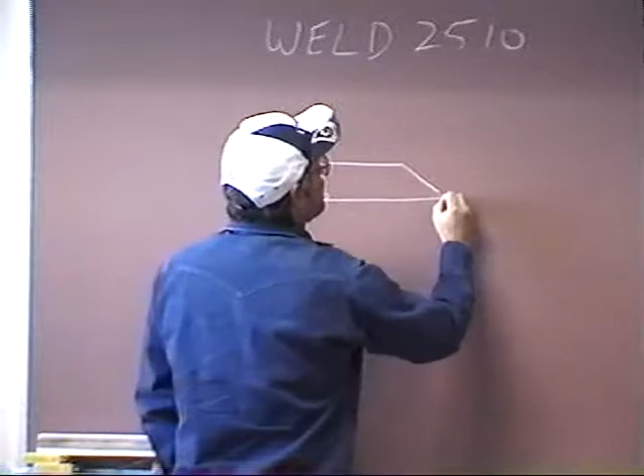Keep that in mind whenever you're making your weld. So you've got solid metal there, and when you put that weld in there, it has got to be solid metal. If you have a discontinuity, a defect in there—trapped slag, porosity, something of that nature—then you don't have solid steel to solid steel.

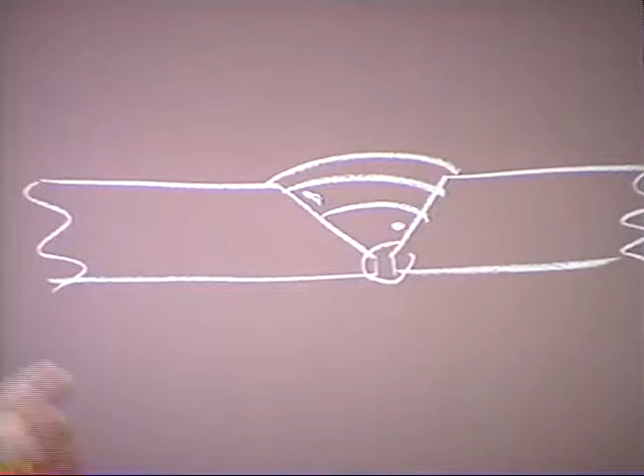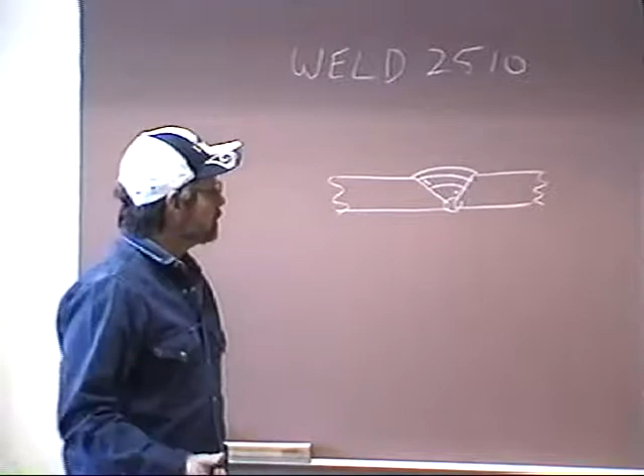And of course, if this trapped slag and porosity or any other indications exceed allowable limits, then you have a defect. It's very important. As a craftsperson, as the welder, the one applying that weld, you are your own best inspector. You've got to watch it. You've got to make sure that you do it correctly.

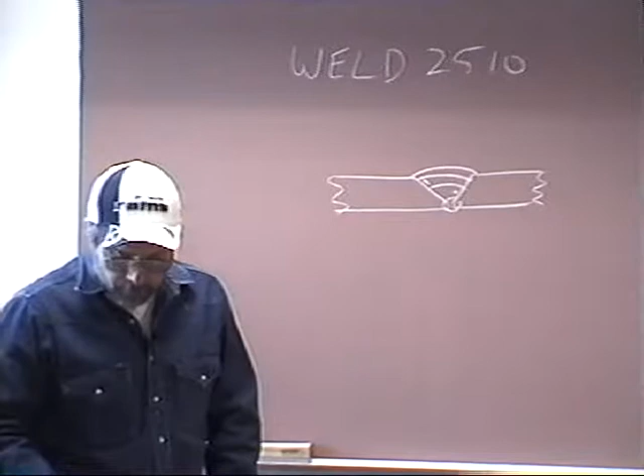To be a successful pipe welder and achieve high-quality welds, such as shown in Figure 1.1, it requires practice in welding pipe. It cannot be learned by reading a book alone. However, if incorrect techniques are repeated, practice alone will never lead to successful pipe welding.

We do an awful lot of training of people who have been in industry. Some of them are quite good. Some of them, however, have never taken a lesson in their life, and they think they're doing things correctly, but they don't understand proper technique, and they don't really think about the overall quality of the weldment.

One of the tasks that my colleagues and I have when we're teaching somebody how to pipe weld is to break bad habits that people acquire over years. If you start out doing something incorrectly and nobody ever shows you the proper way to do it, you will continue to repeat those incorrect techniques, and you're not going to be successful in this as an endeavor. So pay attention to what we're teaching you and try to follow our techniques, because it's proven repeatedly through practical terms that they are successful and they are correct.

Flip the page. Let's talk about pipe welding positions. We've covered this pretty much in other courses, so this is more for those of you that have taken this as a standalone class. On page 2 it says the welding positions are defined by standard symbols which are shown in Figure 1.2.

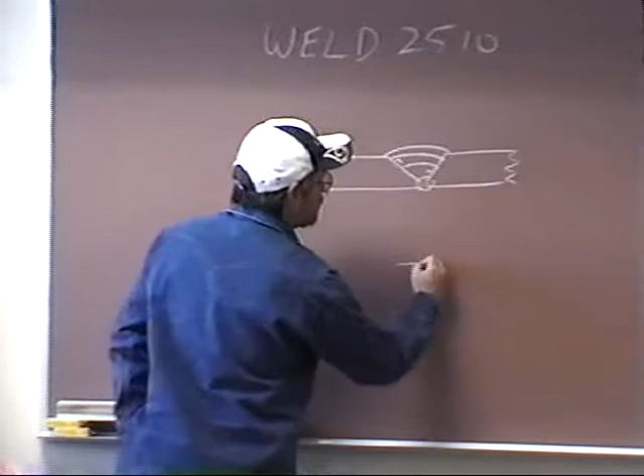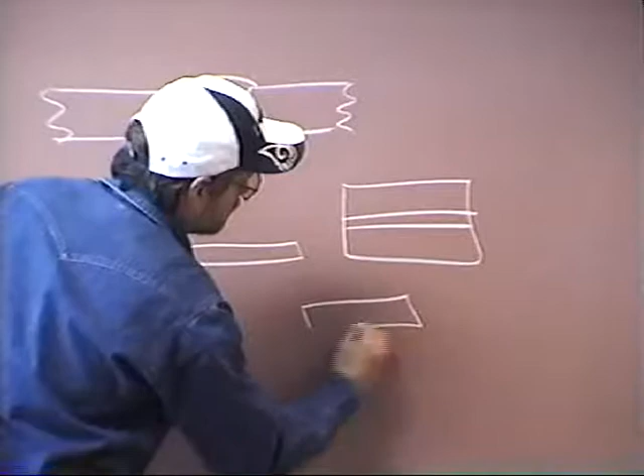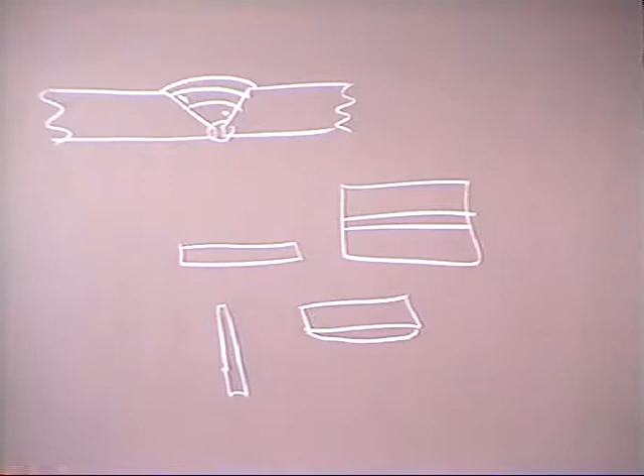And of course we have flat, horizontal, vertical, and then overhead, where your weld is on there. So flat, horizontal, vertical, and then overhead. And they're defined as 1G, 2G, 3G, and 4G positions.

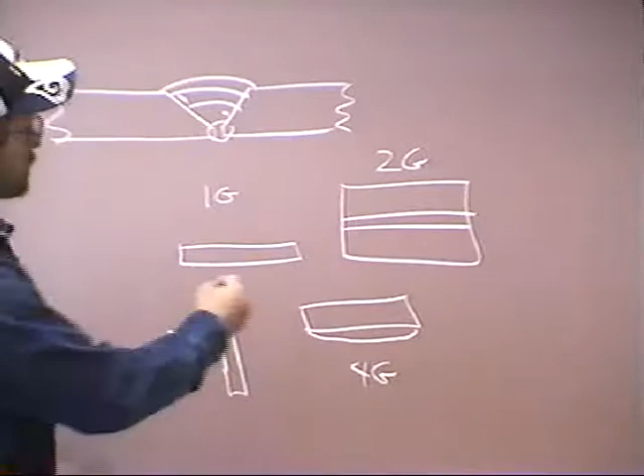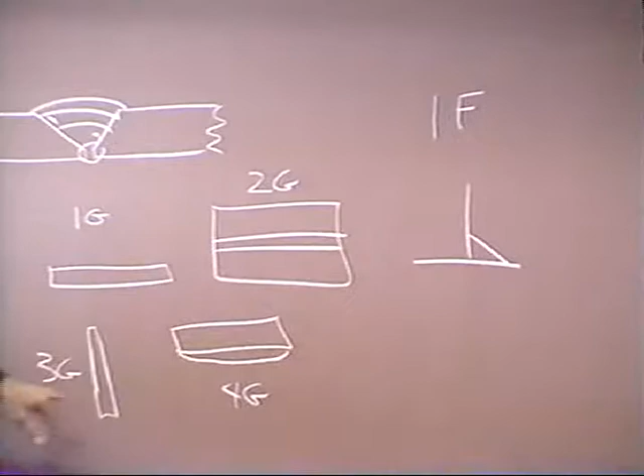1G, 2G, 3G, and 4G. And the G, in this case, stands for groove, since we have a groove weld here. If we were doing fillet welds, instead of a G, we would have an F. So a fillet weld would be something that you might put on a T-joint. Instead of being 1G and so forth, it would be 1F, 2F, 3F, and 4F.

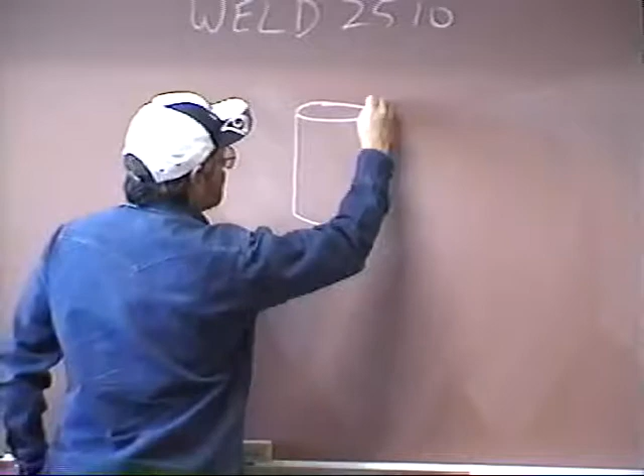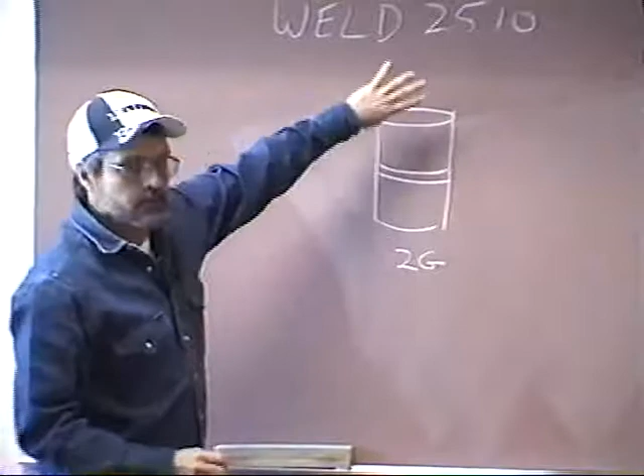The ones we're concerned about in pipe welding—there's only 3 symbols used in pipe welding. We have the 2G position, like so: 2G, in which the pipe is vertically fixed. This is called the vertically fixed position, but you're welding in the 2G, or horizontal, position.

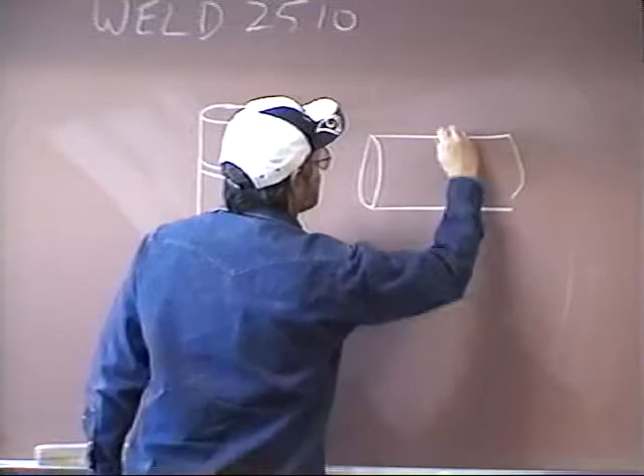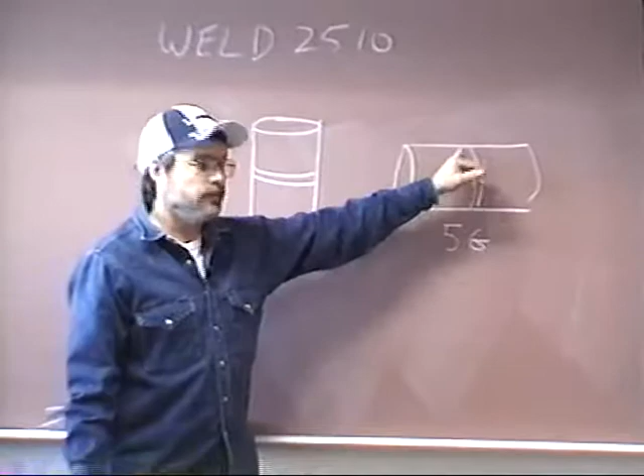Then we have the 5G position, in which the pipe is horizontally fixed, and the weld is then vertical. And of course you can go vertical up or vertical down, depending on the type of steel, the procedure you're using, and any alloying elements that's in the steel.

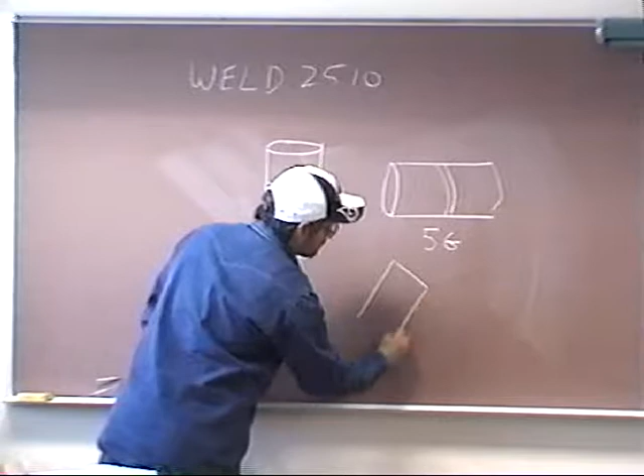And then finally, we have the 6G position, which is a 45-degree angle. Its nickname is an Arkansas bell hole. You may hear that term.

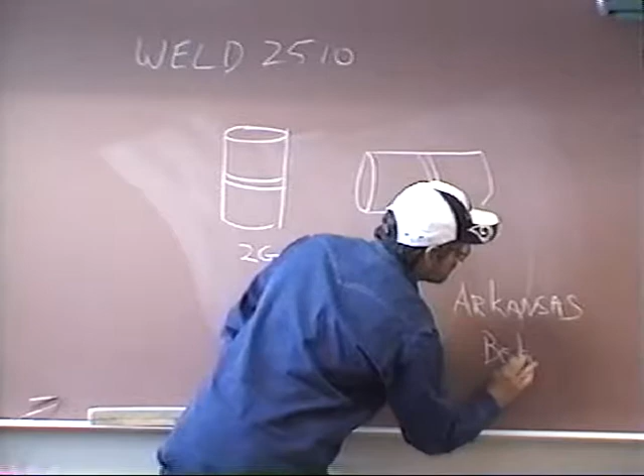An Arkansas bell hole. It got that nickname because in Arkansas, if you've ever been there, you have the Ozark Mountains up in the northwest corner, and it's just hilly, very, very hilly. Anyway, that's what it's called.

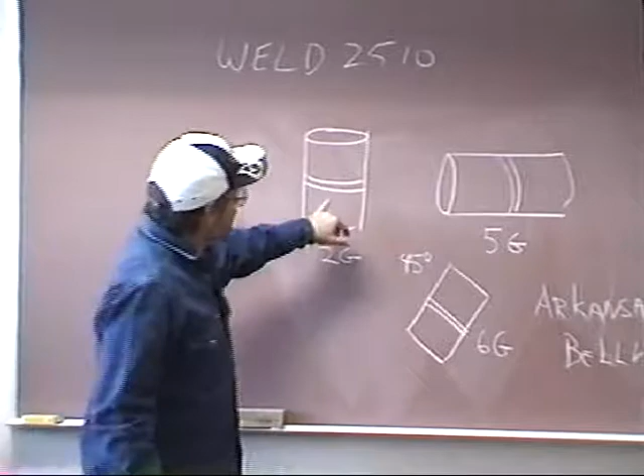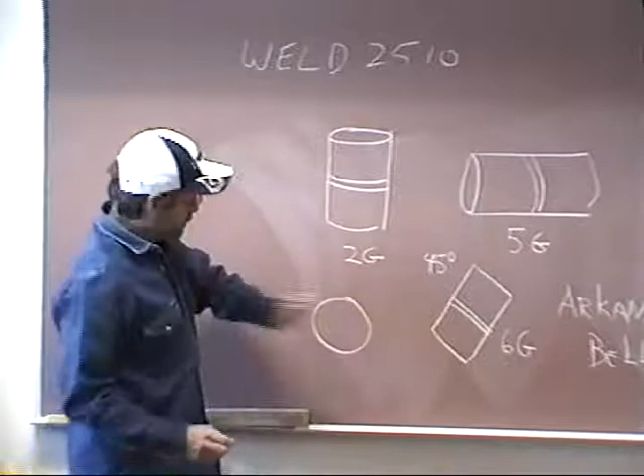So you have 2G, 5G, 6G, and when you go to test out of this class, we're going to have you take one piece of pipe, looking at it down, and weld half of the pipe in the 2G position, the other half in the 5G position. This is simply to test out of the course.

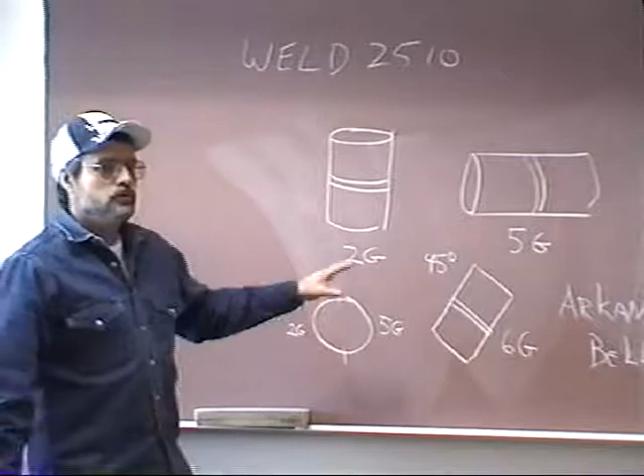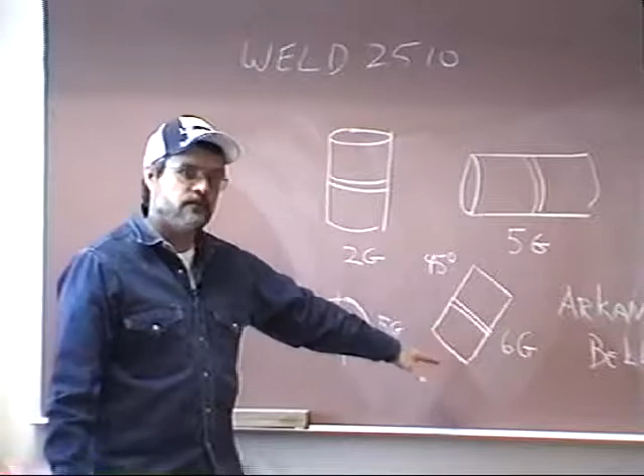When you go to do your 6G position, we will have you do an entire pipe in the 6G position. The reason is because you're not only testing out of the course with that, but if you successfully pass and meet all the visual examinations and destructive tests, we will write you welder certification papers based on your 6G position. So those are the positions we're concerned about in pipe welding.

Going back to your book now, look at the bottom of the page where it says: in preparing to make the weld, the welder is concerned with the following matters. 1. The type of metal to be welded. 2. The selection of the correct weld electrode. 3. The preparation and cleaning of the edge or weld joint. 4. The fit-up of the pipes to obtain correct alignment. All of those things are important, and they are addressed in the WPS, the Welding Procedure Specification.

Going to the next page, one of the things the welder has to be cognizant of whenever making the weld is the puddle and the keyhole, and we're going to stress that throughout this text. When you're making this pipe weld, doesn't matter which position you're in, it's just like when we were welding plate. You want to hear that sound of penetration, you want to see that little keyhole coming across there, and make sure you're tying into both coupons equally. So concentrate and focus on that keyhole as you're making your weld, particularly your root weld.

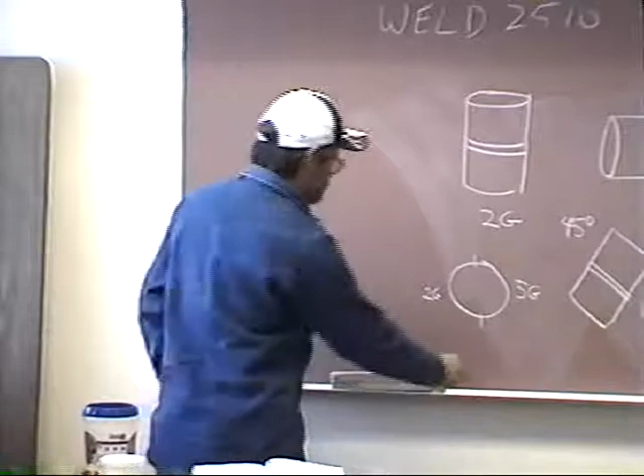Next heading is basic pipe welding procedures. It says when the pipe is in the 5G position with its axis horizontal, as shown in figure 1.3, positions on the pipe can readily be identified by their likeness to the numbers on the face of a clock. Thus, the top of the pipe is in the 12 o'clock position, the bottom of the pipe is in the 6 o'clock position. So here we have 12 o'clock, here we have 6 o'clock, here would be 9 o'clock, here would be 3 o'clock, and so forth.

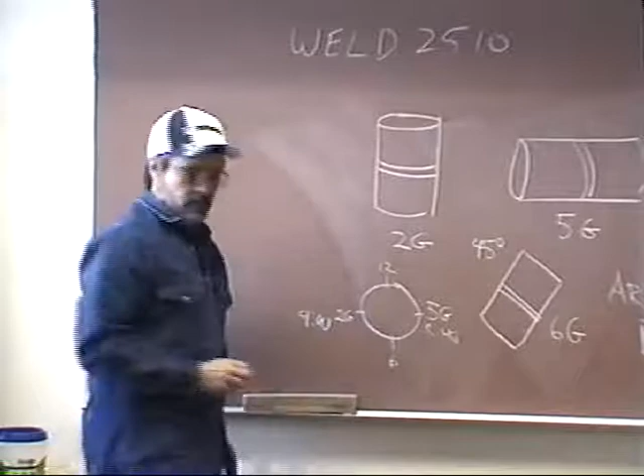Two different welding procedures are used when the pipe is in the horizontal position: downhill and uphill pipe welding. So it would be vertical up or vertical down. The choice of method is not affected by the diameter of the pipe. It depends primarily on the wall thickness and the alloy content of the pipe.

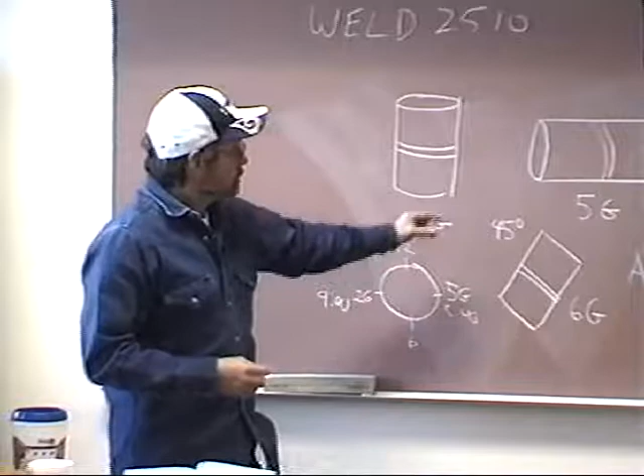So we could be welding just a piece of 2-inch pipe, real small as this cup. We could weld 2-inch pipe in the horizontal position, but it would be vertical up or vertical down. Or we could weld a pipe as big around as this blackboard itself is. Doesn't matter. Diameter doesn't matter.

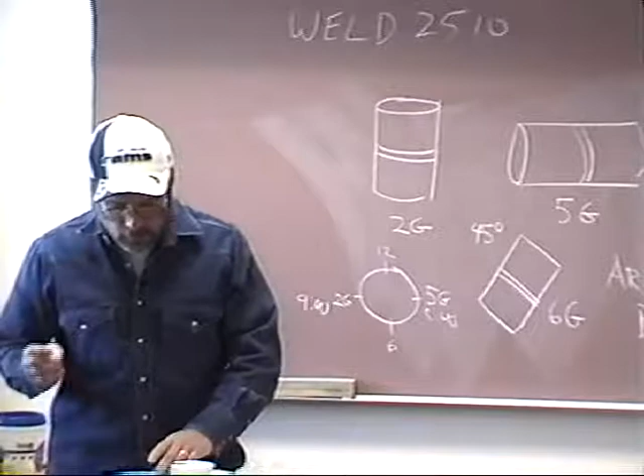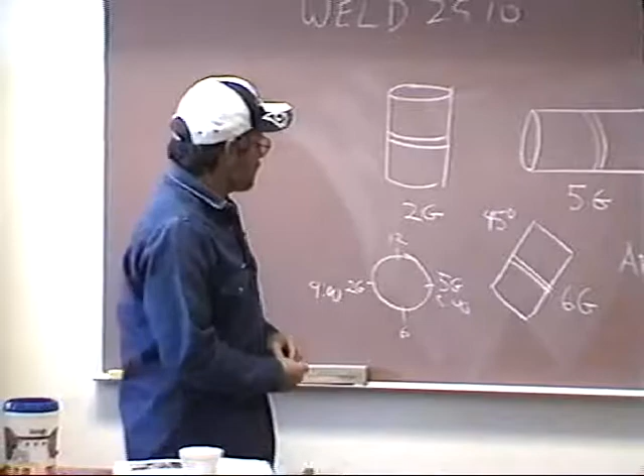Regardless of the method used, the pipes must first be tack welded together. For downhill welding, the weld is started at the 12 o'clock position, and the weld bead is welded progressively downward around the pipe until you get to the 6 o'clock position. Then you will go back up to the top, start at the 12 o'clock position again, and weld downhill once more. So when you're welding in the downhill position, you're going to start here, weld down, start here, and weld down.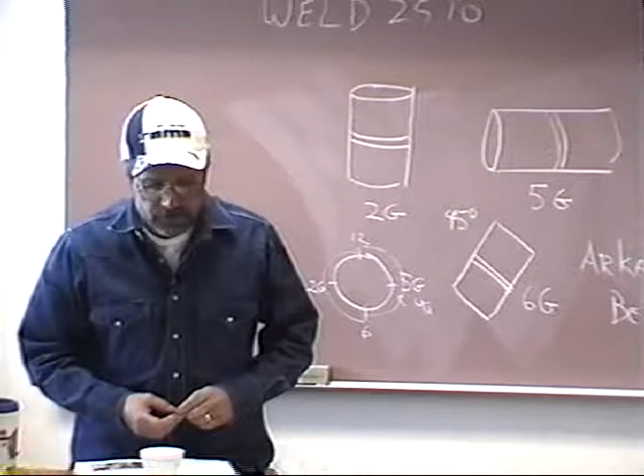Downhill pipe welding is used primarily to weld thin wall mild steel pipe having a wall thickness of 1/8 to 5/16 of an inch thick. The relatively thin wall of the pipe retains the heat longer than thick metal would. This causes the metal in the weld area to cool more slowly if the speed of welding and the heat input are the same. Slow cooling is desirable because a softer and more ductile grain structure is then obtained in the weld and in the weld area.

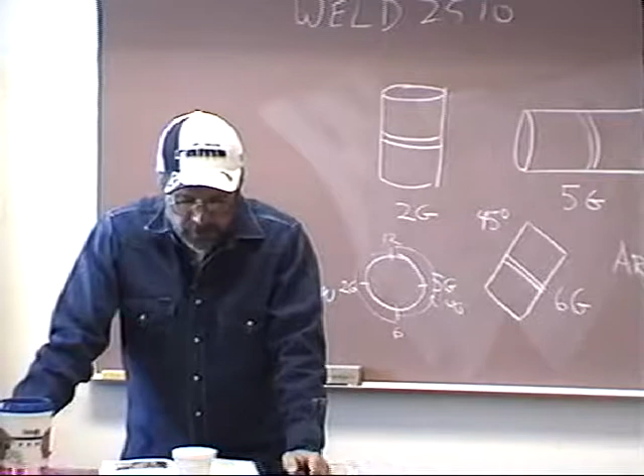When welding mild steel pipe, the slower cooling rate of the thin wall pipe makes it possible to deposit a weld at a faster rate without harmful effects in the welded joint. For this reason, downhill welding is preferred when welding thin wall pipe on mild steel.

The ductility of the metal in the weld and in the surrounding area can be further improved by depositing several beads around the weld. Each succeeding bead heats the previous bead, which then cools relatively more slowly.

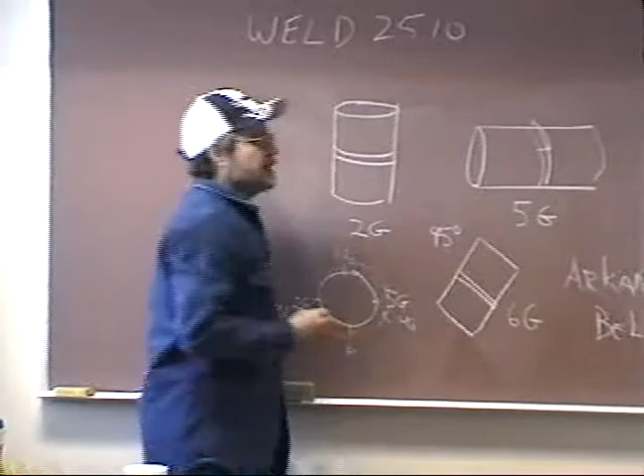With a lot of these downhill pipe welders that come in here to be tested, we will time how long it takes them to make a weld, starting at the top. Maybe they'll only get a third of the way down. We'll use our stopwatch to time how long it's taken them, and then measure how far they went. Using that and the amperage off their welding machine, we can calculate how much heat they're putting into the weld.

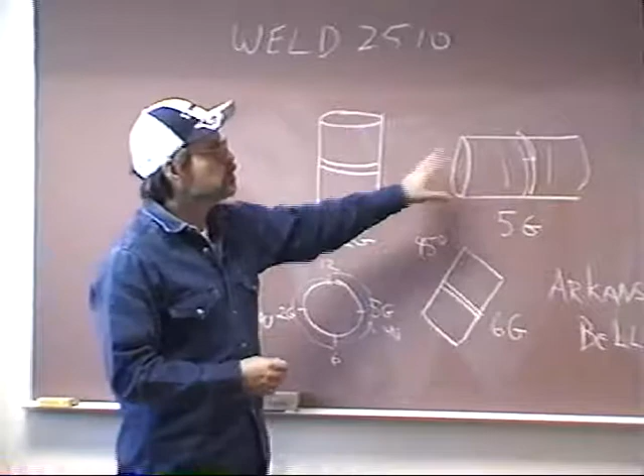We also want to check the interpass temperature. We'll take a crayon and make a mark a couple of inches from the weld area to see how hot that base metal is. All of that's designed to give us an idea of the rate of cooling, so we'll have some idea of what the grain structure is going to be like when they're finished.

Downhill welding requires the use of fast freezing, lightly coated electrodes such as 6010, 6011, 6012, 7010, and 7014. In today's industry, in our area here in southwest Wyoming, a lot of companies are using what's called 8010. Its trade name is 70 Plus, produced by Lincoln, but it's an 8010 rod.

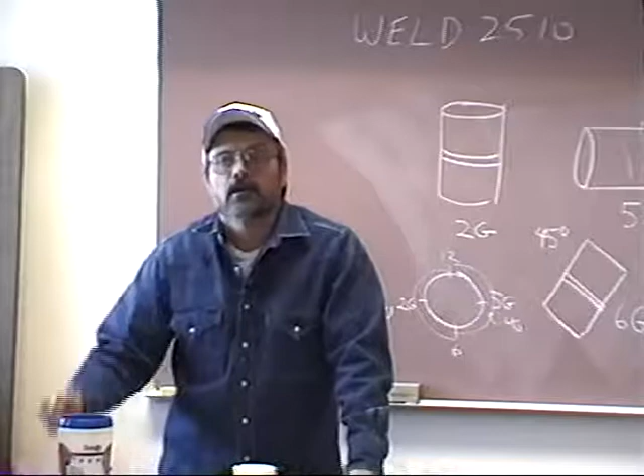It's a higher tensile strength, so control of the heat input is even more critical, because as you may recall from previous classes, the higher the strength, the more susceptible it is to cracking. So you really want to be careful about the amount of heat input that you have.

As the electrode is moved down along the joint, the molten puddle and its slag covering will tend to smother the arc, causing porosity and slag inclusions in the weld. The use of the proper electrodes, proper rod angle, and adequate travel speed, keeping ahead of the molten slag, will ensure sound welds. In some instances, the use of straight polarity along with the downhill method will eliminate burn-through when poorly fitted joints are encountered.

From previous lectures, you may recall that if we use straight polarity instead of reverse polarity, we're only generating half the heat input into the weld compared to reverse polarity. Therefore, if we have really thin stuff to weld, we're going to want to use straight polarity so we have less depth of penetration.

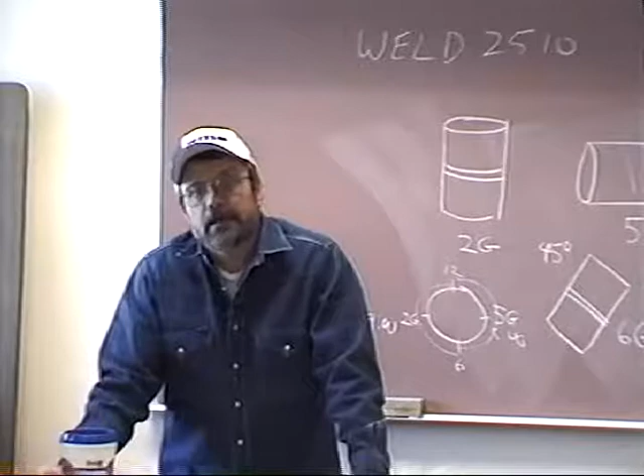The use of heavier coated electrodes such as 7024 and the iron powder, low hydrogen type electrodes such as 7018, are not suited for downhill welding because of the problems of slag entrapment. They really produce a lot of slag, and they're really not designed to be welded downhill, although 7018 is in some cases welded downhill on plate. I've never seen it used to weld downhill on pipe, but sometimes it is on plate.

Let's go ahead and turn the page to page 6. It says, in recent years, as the demand for larger diameter pipe with thicker walls for transporting crude oil over very long distances and natural gas at high pressure has grown, the pipe industry has responded.

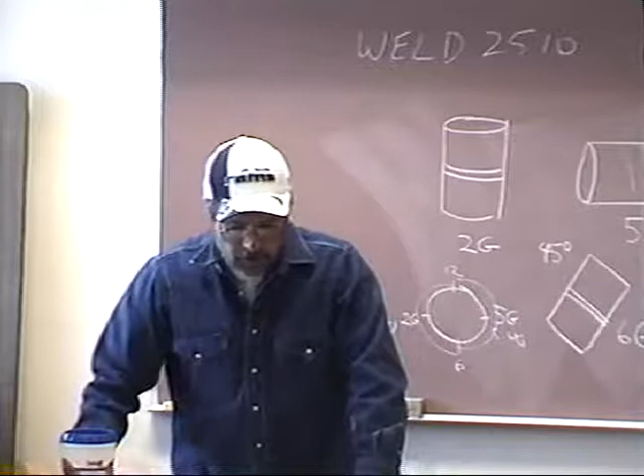Has improved the mechanical properties of the pipe by additions of manganese and silicon, along with more rigidly controlled amounts of carbon. Also, small amounts of columbium and vanadium have been added, usually in the range of 0.2% to 0.26%. Such materials are known as low alloy piping, because attempting to increase strength by excessive alloying causes additional problems in welding, such as cracking and embrittlement of the heat-affected zone.

So we're back to high-strength, low-alloy steels here again. They're putting in just a little bit of alloying elements, and if you recall from one of our previous lectures, they can increase the strength by about 30% by just adding small amounts of these without really having to increase the carbon content overly much.

Now, increasing the carbon, manganese, and silicon content to achieve these higher level mechanical properties may seem reasonable. However, it will not be in the interest of joining pipe edges by welding without risking faulty welds. Even small quantity increases in carbon can have great effects, increasing both the tensile strength and the hardness. Likewise, manganese will increase both toughness and ductility, but will suffer from not having the necessary value to resist cracking. So when you're making a weld, be aware of what that pipe, that base material, is comprised of.

If it's got a lot of high carbon or high alloying elements in it, there are references that will tell you, and it should also explain it in the WPS you're working from, what type of post-weld heat treatment it may need, what type of preheat it may need. It may even limit the size of electrode you can use, requiring only a 3/32 or an 1/8 inch electrode instead of a 5/32 or a 3/16, which some pipe welders are very fond of using. So be cognizant of that.

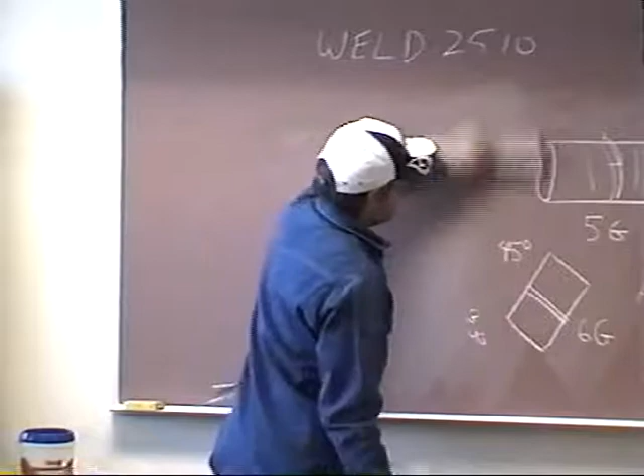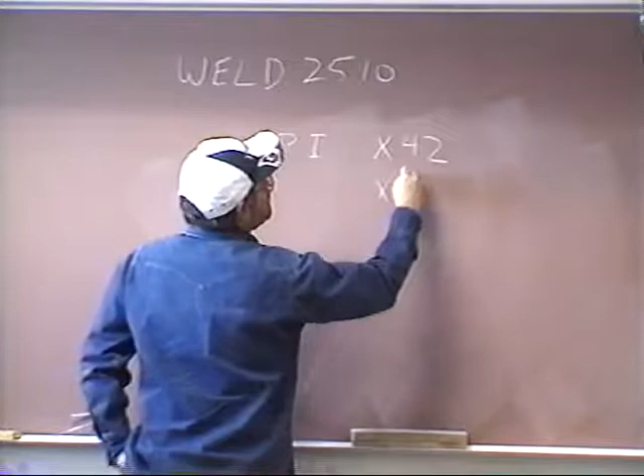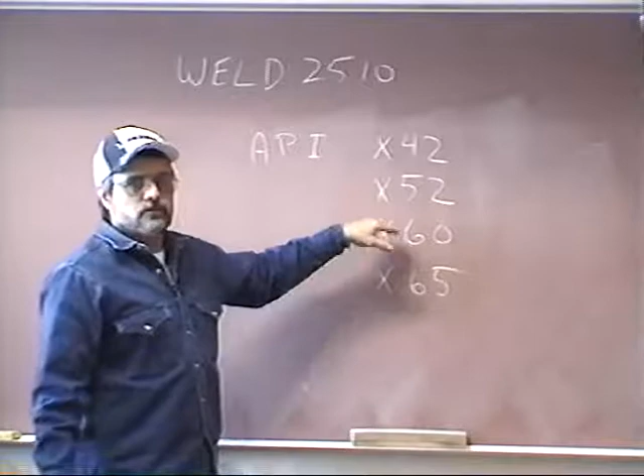X65 and X60 are very high strength. The 60 and 65 refers to their yield strength. If you remember from a previous lecture, we talked about yield strength and tensile strength. You might have API X42 - that's one of the standard sizes they use. X52 is a standard size, X60, X65. These numbers refer to the base metal's yield strength, not their tensile strength.

So X42 will yield, that is, it will go from elastic to plastic at 42,000 pounds. And at that point, once you cross that threshold by stretching it, you cannot go back to its original shape - that's its yield point. This one has a 52,000 pound yield strength, and 60,000 pound and so forth. But the tensile strengths are generally much higher.

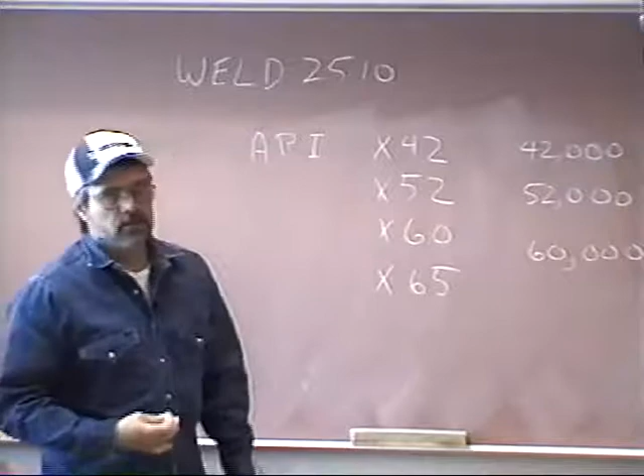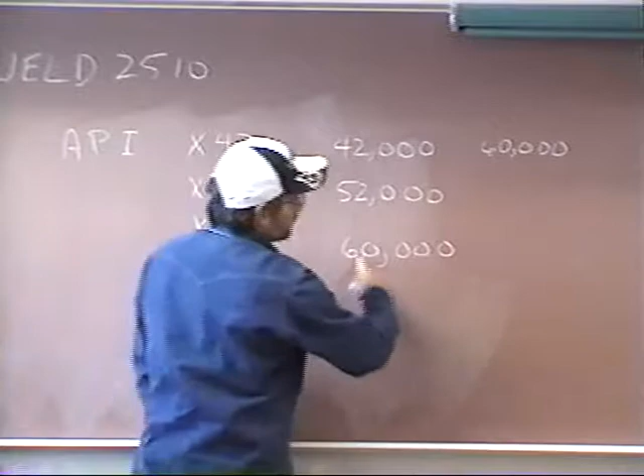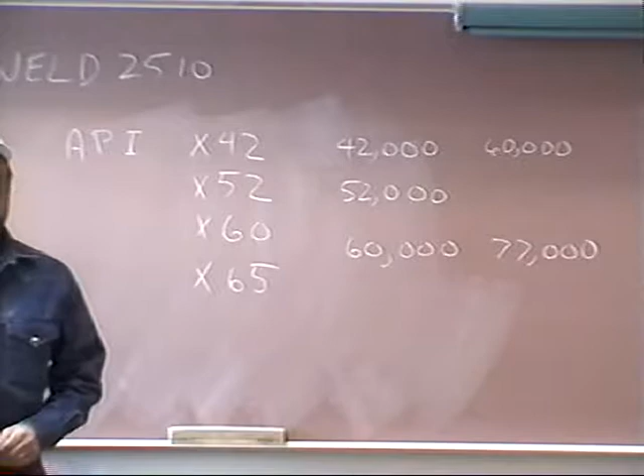I believe the tensile strength for X42 is 60,000. The tensile strength for X60, I believe, is something in the neighborhood of 77,000 pounds. So you can see it's got a lot more strength. You can assume it has more carbon and alloying elements in it, so therefore it's more susceptible to cracking.

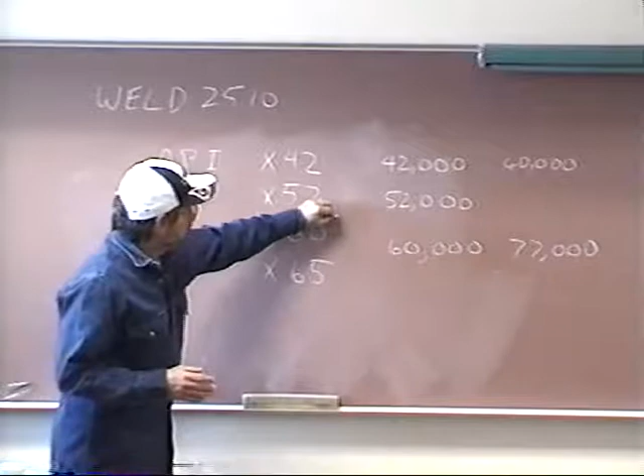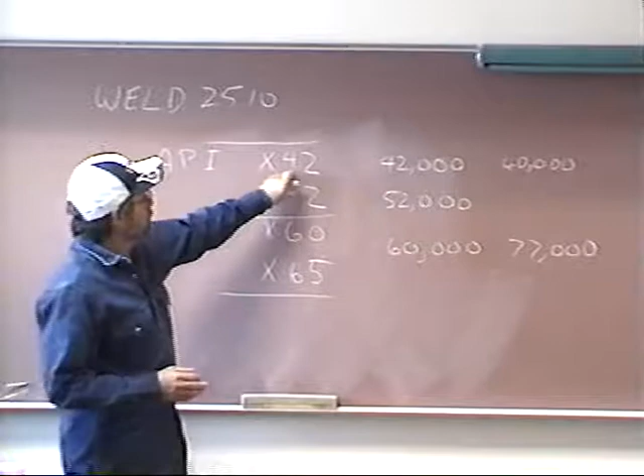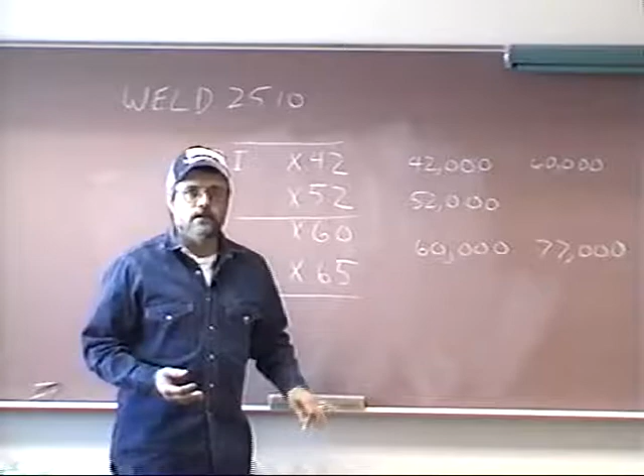When you qualify a welding procedure to API standards, if a change in metal group - and API divides these into different groups - would require a different procedure. If I made a weld using X42 pipe with 6010 and 8010, that procedure would not be qualified to use on X65 because it's such a much higher strength steel. We would have to qualify an entirely new procedure.

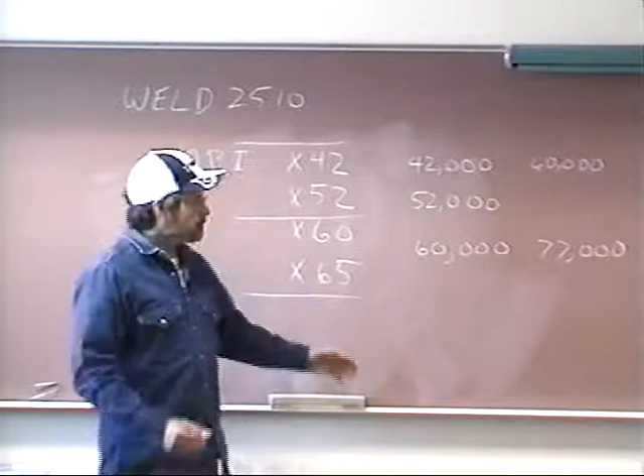You have to take precautions. If you're welding X42 or X52, we may just take a rosebud or a cutting torch and drive the moisture out of the weld, then go ahead and put our weld in and be done with it. Here, because we have much stronger, higher tensile strengths, we're going to preheat that up to 200 degrees and take special care to make sure it's preheated. Then we'll produce our weld, and we may want to wrap the weld when we're done - wrap it with some asbestos blanket or something, in order to let that heat precipitate out more slowly and relieve some of that stressing.

So pay attention to the amount of carbon, the type of material you're welding. Again, it goes back to you as the welder - don't trust what anybody else says. If you have an opportunity, read the welding procedure and know.

Okay, again we're still reading from page 6.

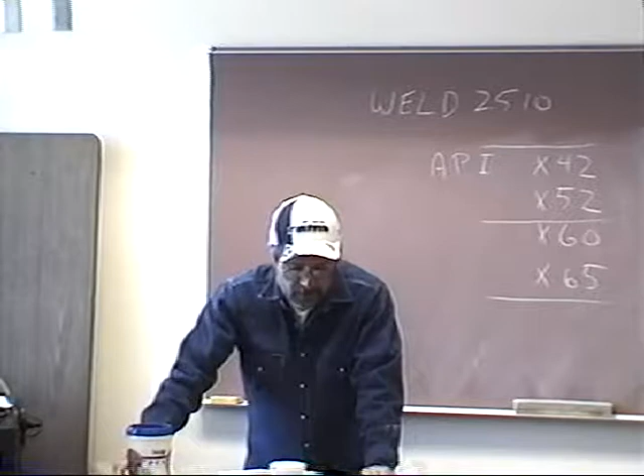It says pipeline welders are on the go all day. They are provided with welder helpers who are responsible for grinding and wire brushing each layer of weld deposit. They are also responsible for adjusting the welding current as instructed by the welders, keeping the welder supplied with electrodes, and handing the welders an electrode each time the one in use is consumed. The welders' helpers play a very important role because of their knowledge and experience in grinding and brushing weld complements the welder's efforts in making perfect welds.

So if you ever run your own truck and you have a welder's helper, you want to be sure that welder's helper is competent in his tasks, because if he messes up, it's going to be a reflection on you.

Going to the next page, it says because of their role with preheating, interpass temperatures, screening welds from wind and rain, and observing surface defects, welders' helpers should be formally trained. And it notes that Chapter 8 continues the discussion on pipeline welding. So if you have a welder's helper, make sure that he knows what he's doing.

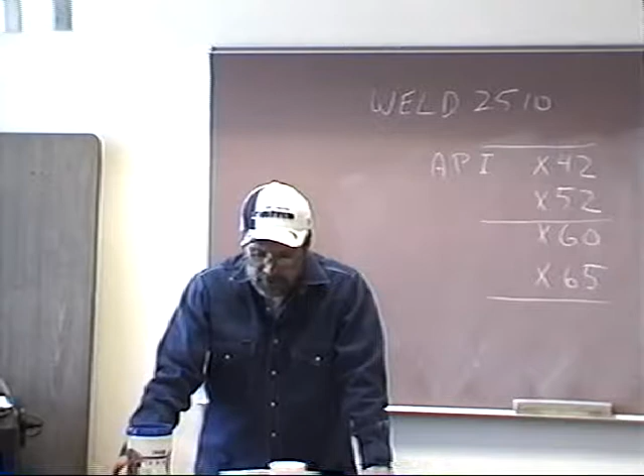Uphill pipe welding: after the pipe has been tack welded, the weld is started at the lowest spot on the pipe, or at the 6 o'clock position. The bead is deposited upward around the pipe until the 12 o'clock position is reached. So out in the field...

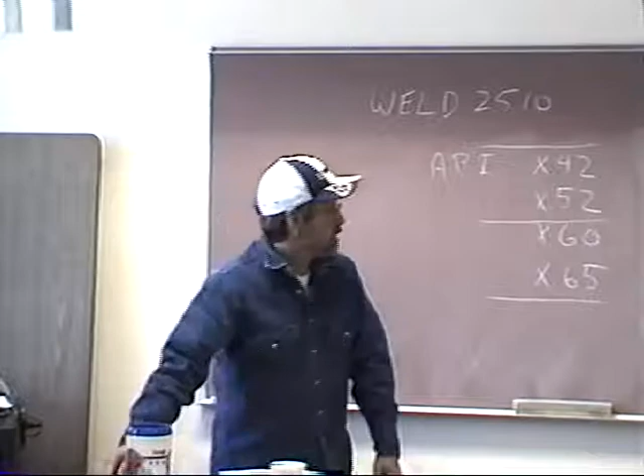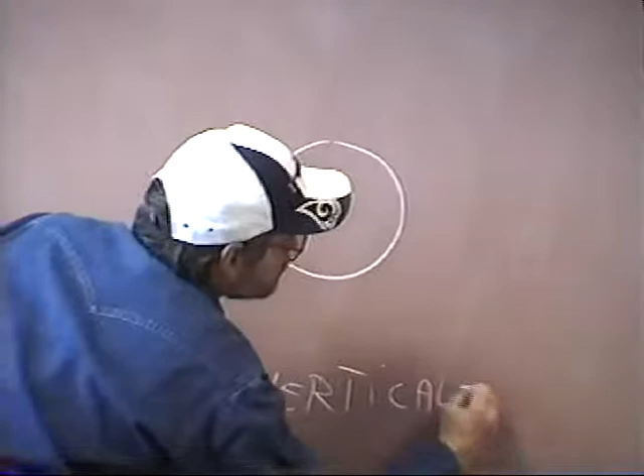If you're going to weld in the vertical up - and this has to be written on the paper, by the way - this is called your progression, vertical up or vertical down.

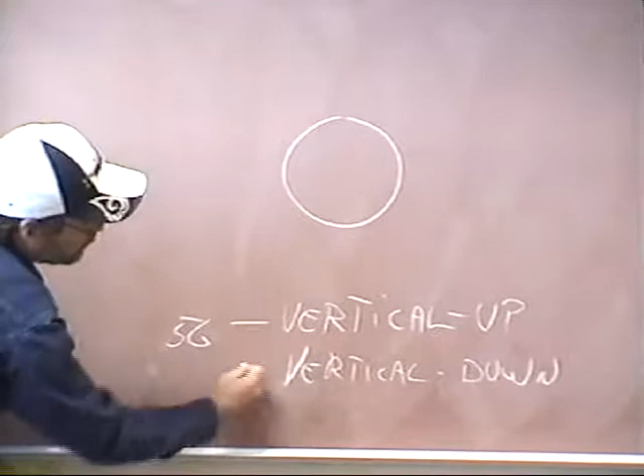And the papers would say 5G, and then either vertical up or vertical down. Out in the field, you're going to start down here at the 6 o'clock position and weld up.

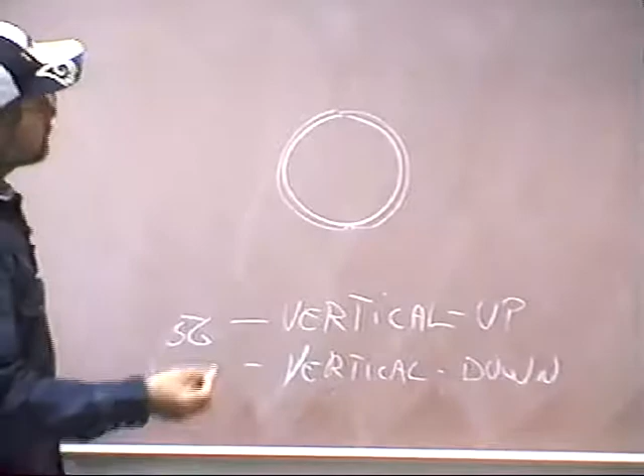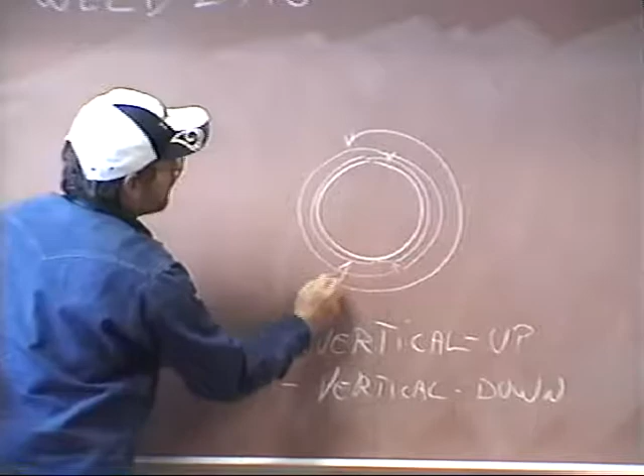But I always recommend to our students, and this is important, stagger your starts and stops. If you put your root pass in like this, when you start your filler, come over across bottom dead center a little bit and weld vertical up across bottom dead center, then complete that weld on the other side. Then with your next bead, come over here across bottom dead center a little bit and come up across top dead center, then complete that weld. So you're staggering your starts and stops.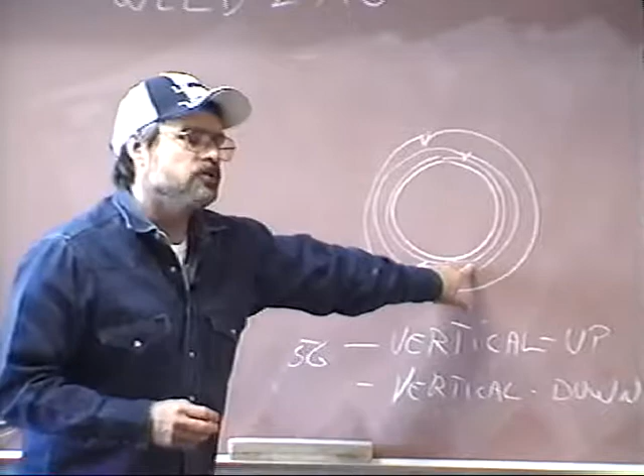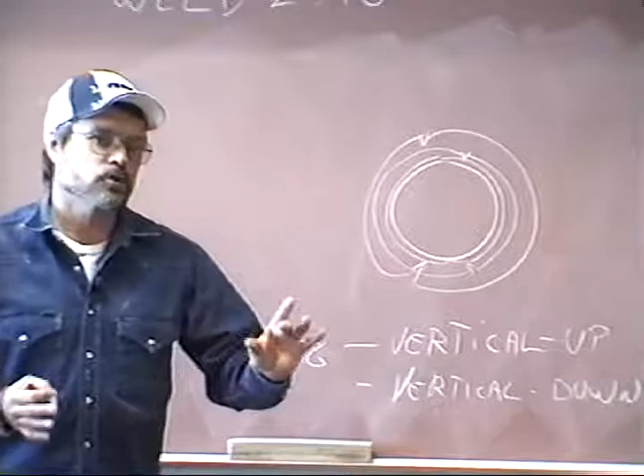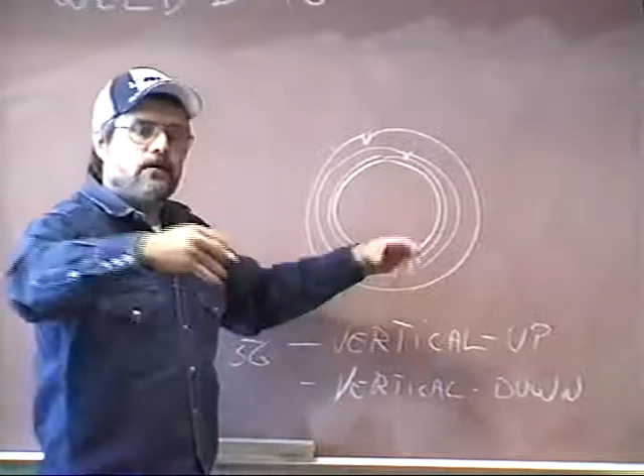There's a couple of reasons for this. By staggering your starts and stops, you're going to get a little stronger weld in here. But more importantly, if your work is going to be X-rayed, there are limitations to the amount of defects you can have in any single square inch of your weld. So by staggering your starts and stops, if you've got a little bit of porosity here and maybe some slag right there and some more porosity there, you've spread those defects out over a longer area.

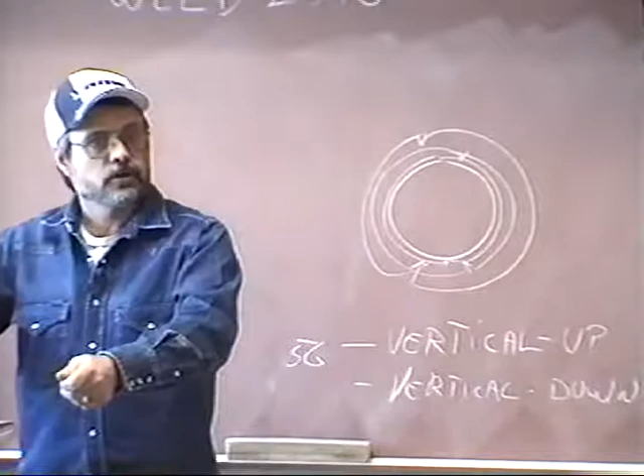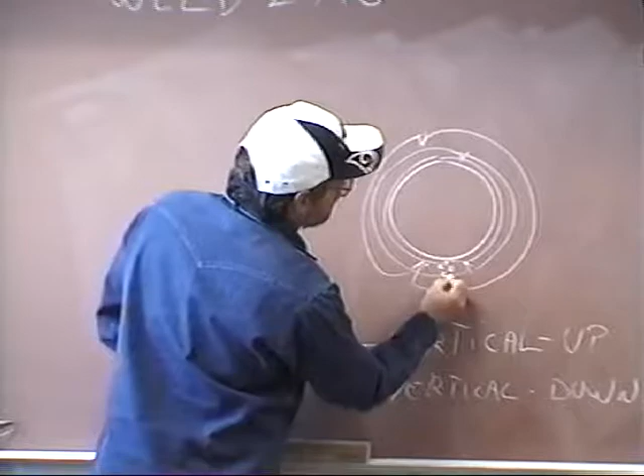When that X-ray technician shoots that, he can see, well, here's porosity, here's slag, here's porosity, but he'll compare it to the code you're working to, and he'll say, okay, this is okay, it meets code requirements because it's spread over this long of an area. But if you make all these starts and stops here in the same place, look at this. Now you've got such a concentration of defects that exceeds allowable limits. That's a rejection. So you want to make sure you stagger your starts and stops, and even coming up the side.

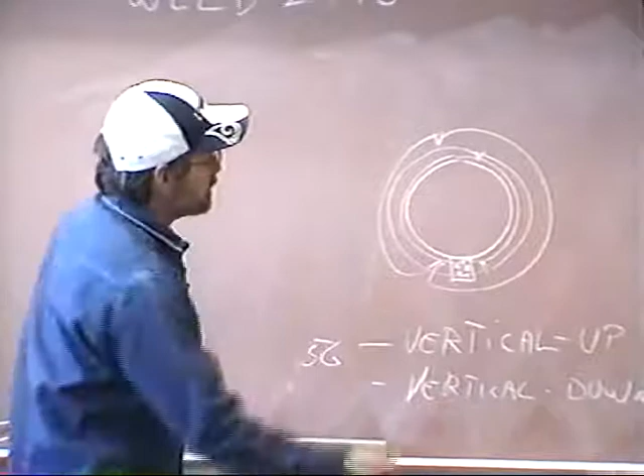Don't stop at the same place every time. Take them a little bit further, and then back them up. So you want to have at least a half an inch between each start and stop. Preferably more like an inch between each start and stop.

Okay, going back to your book again. Page 7, the paragraph just above that photo, it says, this method is preferred for welding heavy wall pipe and pipe made of alloy steel. The thicker pipe wall acts as a heat sink by withdrawing the heat more rapidly from the weld area than does a thin wall pipe. The faster cooling rate causes the metal in the weld area to become more brittle in mild steel pipe. In alloy steel pipe, the tendency towards brittleness is greatly increased.

To overcome this tendency, the cooling rate in the weld area must be reduced. This can be accomplished by decreasing the welding speed and by depositing a heavier bead. Both of these objectives, slower welding speed and a heavier bead, are achieved by welding the pipe in the uphill position. So since we've got thicker pipe, we want to heat it up a little bit more. So welding uphill, that's slower than welding downhill, but it also allows you to deposit a larger weld bead. And another thing you can do, depending on how heavy the pipe is,

of course, you can preheat it. And I would always recommend preheating, regardless of what you're welding, if to do nothing else than to simply drive the moisture away from the weld joint. Moisture, of course, contains hydrogen. Hydrogen can get into the weld puddle, causing porosity or even underbead cracking. So I would always recommend that whatever you're welding, grab a torch and drive that moisture out of there.

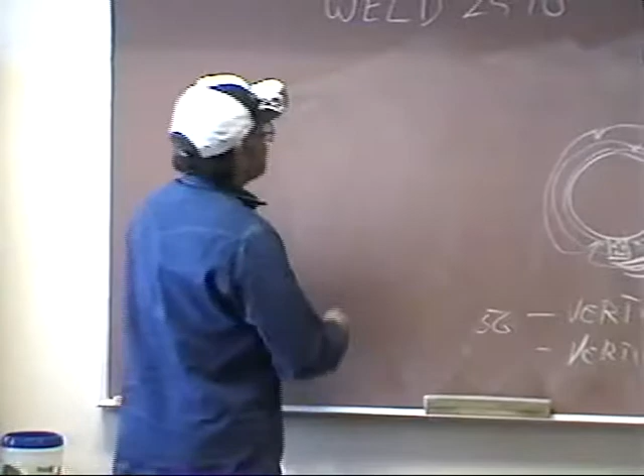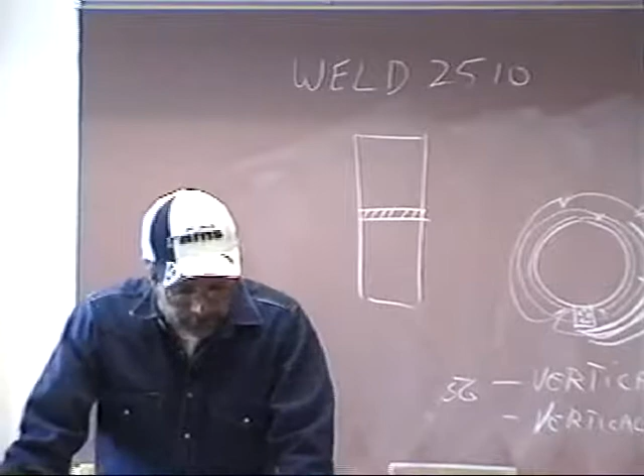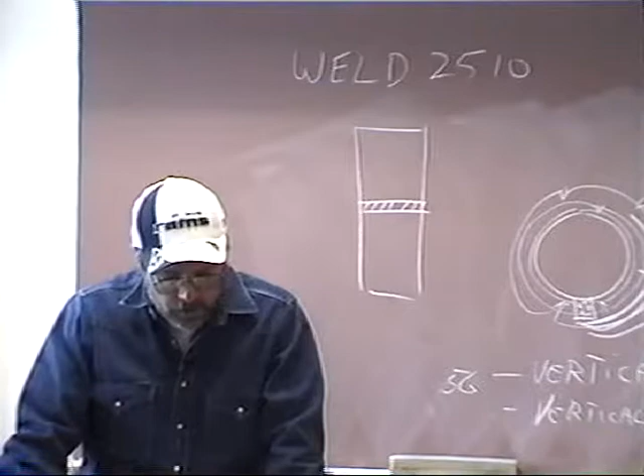Horizontal pipe welding. When the pipe is in the 2G position with the axis vertical, remember we talked about vertical fixed. This is the horizontal. Here's your weld. The weld joint connecting the two pipes is in a horizontal plane, and a horizontal plane or 2G weld must be made around the pipe. Horizontal pipe welding will be treated in detail in a later chapter.

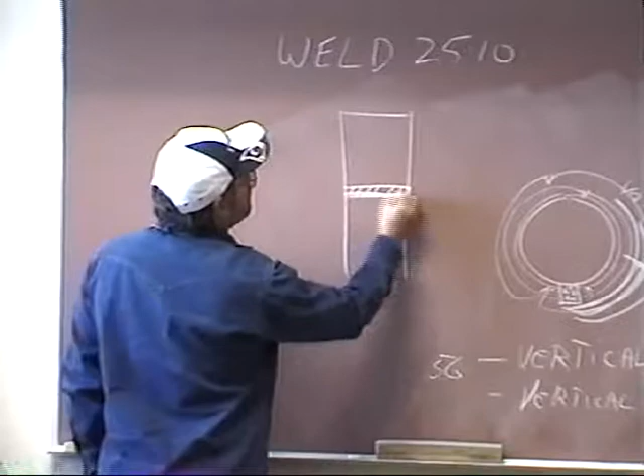Basically, let me say real quickly that everything you do in the horizontal position's got to be stringer beads. Every pass is a stringer bead. Don't ever try to weave in the horizontal position.

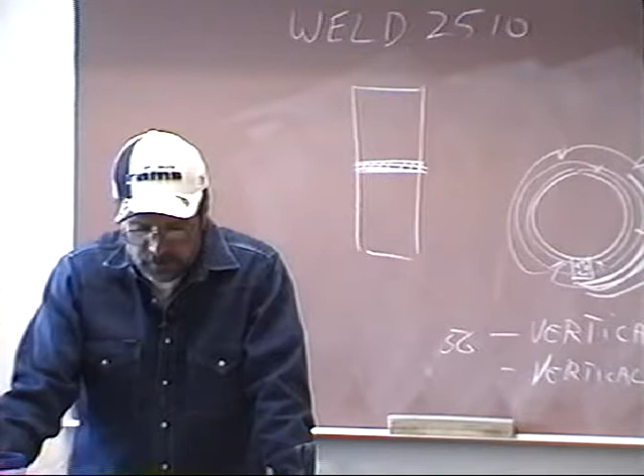Going over to the next page, last page, it says, since public health and safety are involved in almost all of these cases, codes and standards have been established to protect the public interest. The following organizations are primarily responsible for these codes: the American National Standards Institute, the American Welding Society, the American Society of Mechanical Engineers, and the American Petroleum Institute.

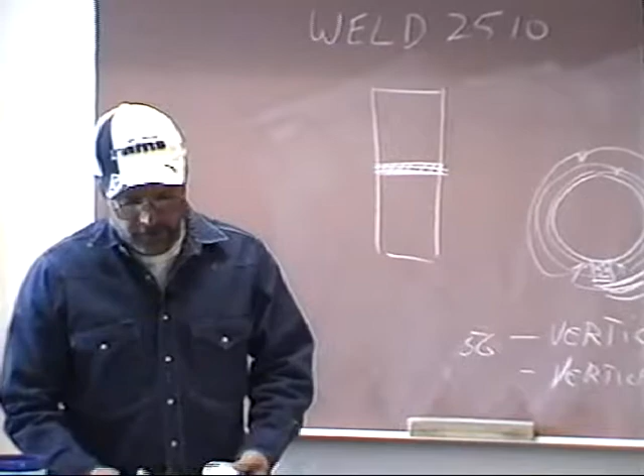And that's pretty much the high points of this chapter, and in this little review, I've touched on every question that will be on your test. So go back over, read it, study it. If you have any questions, get with Jeff and I, and we'll go over it with you a little more thoroughly. Thank you.